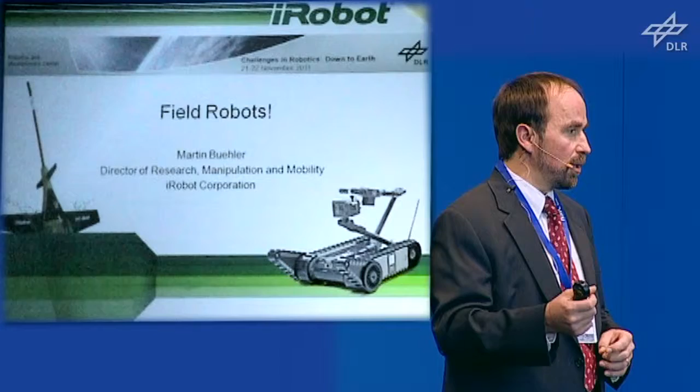Now, knowing that, and given that we have just about only 20 minutes left, I'll keep my message and the story extremely simple. And it's very much in tune with the motto of the Symposium, with the spirit of DLR, which is, let's all together, you and me and all of us roboticists, get down to earth and field robots. So all get down to earth and field robots. There'll be more to that.

But first, I want to get back to the brain. It's a little forgetful, especially since I'm totally jet lagged, so I barely know what I'm talking about right now. But our brains are really good at some things. And I want to start the next slide showing you something that Dr. Rodney Brooks showed in a recent conference at Robo Business in Boston, talking about how wonderful our brains are in terms of perception. So I need your help with that.

So this is a little tough to see on the screen, but it sure looks great on that screen. So what do you all see here? What is that? What do you perceive? Chessboard, checkerboard, with some green cylinder sitting on top of it.

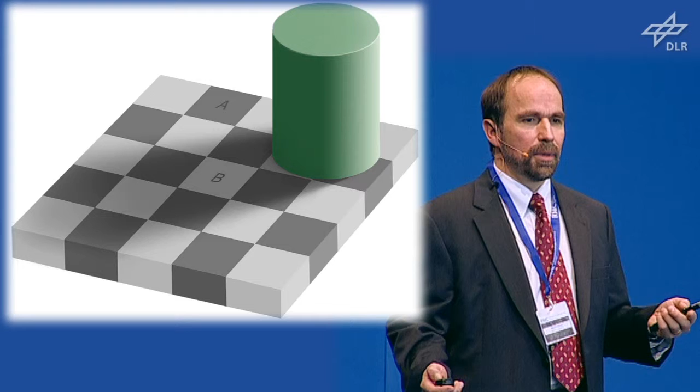So I wanted to pay attention in particular to these two squares, this black A tile and this white B tile. Black A tile, white B tile. So this shows you how amazing our perception is, because the two tiles are exactly the same color. You wouldn't believe that, right? I mean, I didn't believe it. I looked at that. No way.

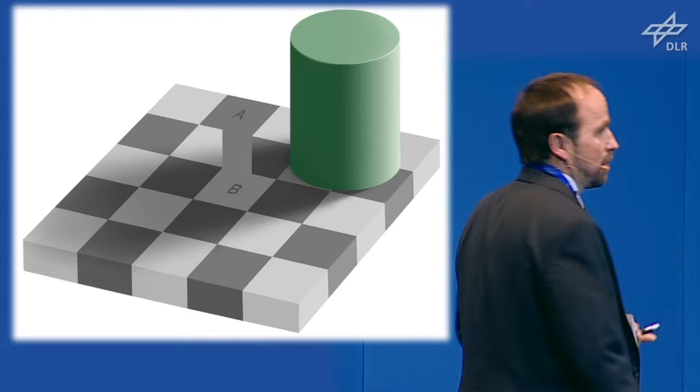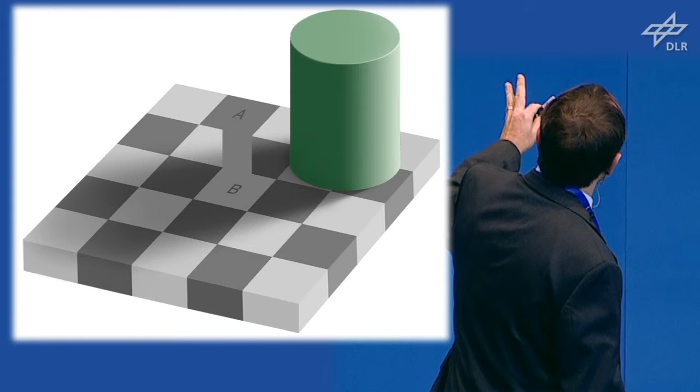They're white and black. So to help you, this next slide, this is all provided by Edward Adelson from MIT, that helps you connect these two bars here to these two squares. Again, it's a little hard to see on this not very high contrast screen, that the two are the same color. And I still didn't quite believe it, because it still looks a little bit different shade of gray. So I took that same picture and I cropped out the two tiles and put them right next to each other. There's no doubt they're exactly the same color.

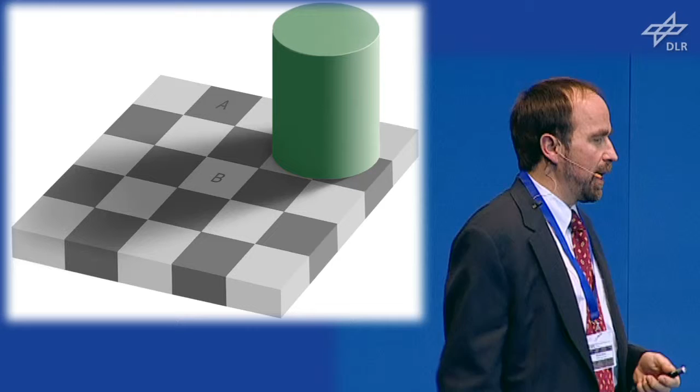So let's go back again. This is where we started. Black tile A, white tile B. This is just an example of how amazing our perception is. And that's combining amazing eyeballs, lots of pixels coming in, together with the brain dealing with all of it and trying to make sense out of the world. This is just a very simple toy example of what we do all the time in much more complicated circumstances. So our brains are maybe forgetful, but they do amazing things in other areas.

So what's the whole point of this? The point is, this is one of the hard problems to solve, and robotics is still far from doing perception like we do. And there are other hard problems, like teaching humanoids to dance and sit down, motion planning, artificial intelligence, dynamic leg locomotion in rough terrain, all very hard problems. We should keep studying those for the next 10, 50 years. But let's take all the great stuff we've developed over the last 50 years, and many of those examples Professor Hirzinger showed us, because those are already good enough to put together in the right combination to solve some real needs in robotics today.

In this talk, I want to give you some examples from iRobot and a few other companies around the Boston area who are living according to the spirit of making practical robots. I'm sure there are many other examples out there, and I'd like us to take that as inspiration to get robots out into the world, so we can take the past 50 years of technology development and turn the next 50 years into a robotic success story, taking robots into mass market applications and making the world a better place.

The mission of the company is twofold: remote presence for government robots, and automated home maintenance for home robots. We have a whole series of robots whose mission is to put distance between harm and people — between danger and our soldiers, between bombs and police and first responders, between radiation and relief workers. Remote presence has lots of applications.

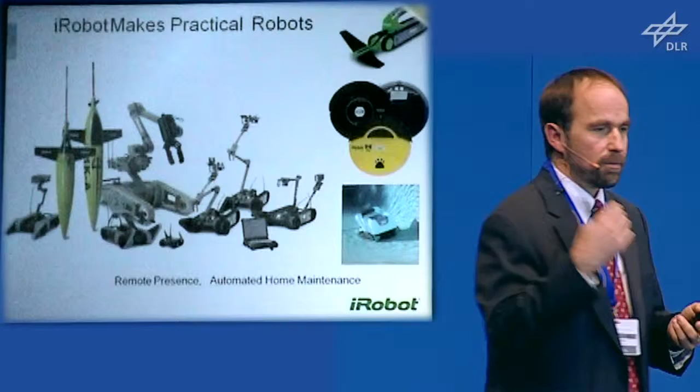We do this across a variety of platforms, from a throwable 5-pound platform we just developed called First Look, to the staple PackBot series we've been selling since 2002, to the 30-pound small unmanned ground vehicles, and very recently we've commercialized the much larger 350-pound Warrior. We also have a couple of robots in the underwater space — these are sea gliders.

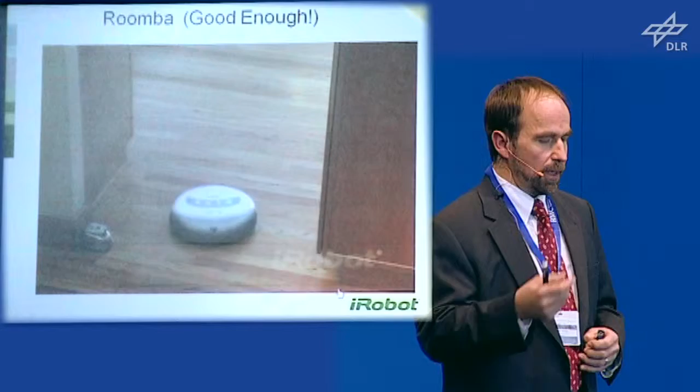A beautiful example — this is an old video I love to show — is the Roomba, getting down to earth with field robots. The company took theoretical ideas from computer science, subsumption architecture by Rodney Brooks, together with simple sensors and reactive controls, and identified a market niche that did something of value to millions of people: vacuuming their floors. Already in 2002, the company fielded a completely autonomous, self-contained, intelligent robot that vacuumed people's floors and returned to the dock when done or when the battery was low.

One nice thing about fielding things early and often is that the market does extensive research and testing for you. At this point, I usually like to show a fun video of a cat riding on a Roomba, and I encourage you all to look those up — there are hilarious cat-on-Roomba videos.

This time, I want to show you some serious field testing that shows some of the abuse and rigor our products see on the living room floor. By the way, this is not an approved use of our product, and it had to go through many iterations to be able to perform this function. I believe it's mostly the fathers who do this stuff and send us those videos.

Moving over to the government and industrial side, here's a quick snapshot of some of the robots in action: PackBot driving around in dirt, SUGV climbing stairs. Our robots are used by police and first responders — there are lots of bomb threats — and they're also saving lives in the military. We do research projects with precision placement. This is the Negotiator robot, which we sell primarily to police and first responders, and it's also a research platform for navigation and SLAM.

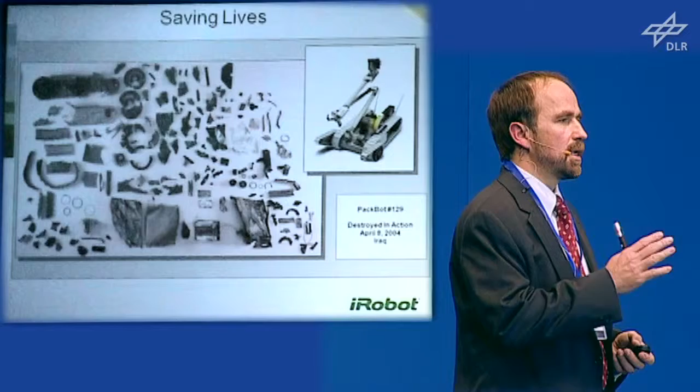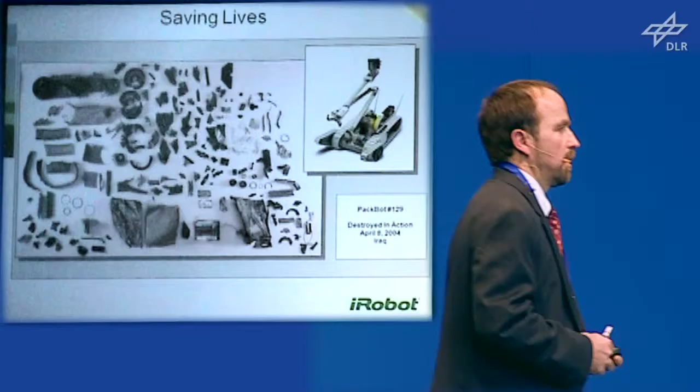This robot that came back, nobody had to write a letter to this robot's mother. It's very easy to replace robots. They're used extensively. I think the number as of last year was, robots like the PackBot have been used over 50,000 times in 50,000 roadside missions. Just imagine the good and life-saving activities this has provided.

Having these robots available, they're rugged, they've gone through many iterations, much money went into developing them, they're easy to use, they're fully supported. Now we're in a situation also to come help when disaster strikes, when duty calls.

And we did that on 9/11 together with other robot companies. At that time, DARPA, the Defense Advanced Research Projects Agency, literally took dozens of robots out of research labs and brought them to the New York disaster site to help look for survivors, go into contaminated areas, or enter partially collapsed buildings.

9/11 was really a watershed event for robotics. Before then, no robots had really ever been used in disaster scenarios. After 9/11, they have been used in every single disaster that happened, deployed on the ground, in the air, and underwater.

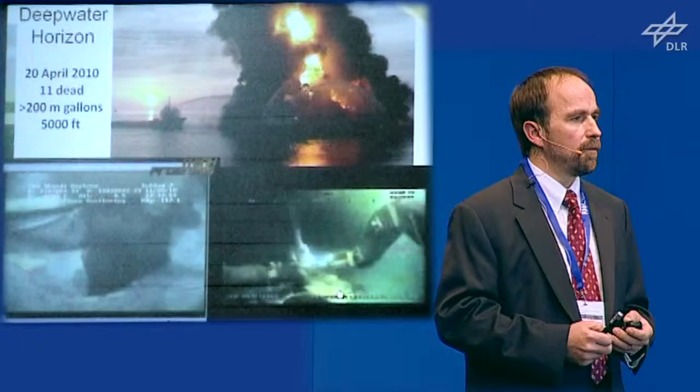Talking about underwater, many of you will still have vividly in their memories the accident that led to an explosion of the Deepwater Horizon rig. Last year, 11 workers died. After everything was said and done, 200 million gallons of oil spilled into the Gulf of Mexico. And all this action and the leak happened at an incredible depth of 5,000 feet. Very difficult to get to.

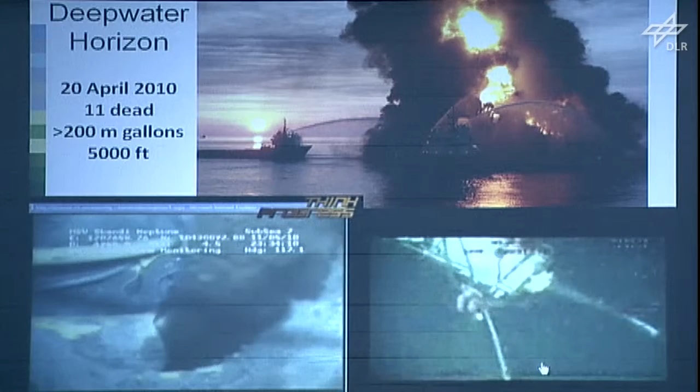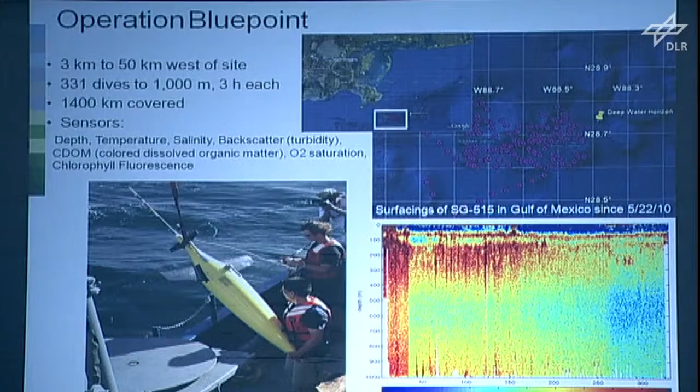There's no human divers that can operate there. So there were literally dozens of robots in operation down there at 5,000 feet, putting eyes on target, helping to figure out how to plug the leak, and actually helping to plug it. At the same time, there were questions and actually some controversy: where was all the oil, all those 200 million gallons? Some could be accounted for, but the suspicion was there were giant oil plumes floating in the Gulf of Mexico.

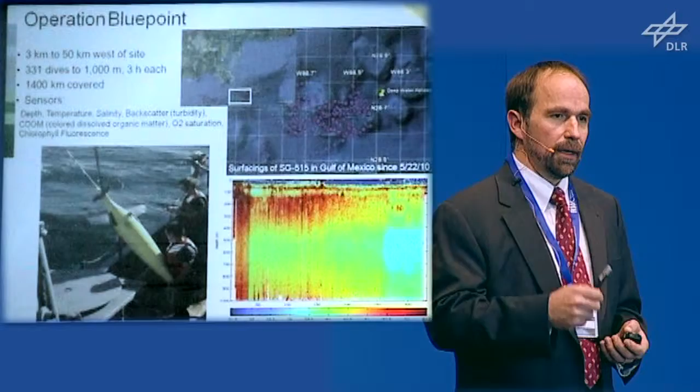We had the technology, the Seaglider that you see here, that we could bring to bear on this. Shortly after the disaster, a couple of highly motivated folks from our North Carolina office simply took the initiative, without anybody requesting, threw a Seaglider on the back of a pickup truck, drove down to Louisiana, deployed the thing, and we did over 330 dives. We worked with local scientists to analyze the data to help settle the controversy that yes, there were giant oil plumes, and then helped monitor the contamination, where the oil was, how much oil there was, and how the oil density and occurrence was developing over time. This was a very important contribution to monitoring the disaster and helping guide the cleanup efforts.

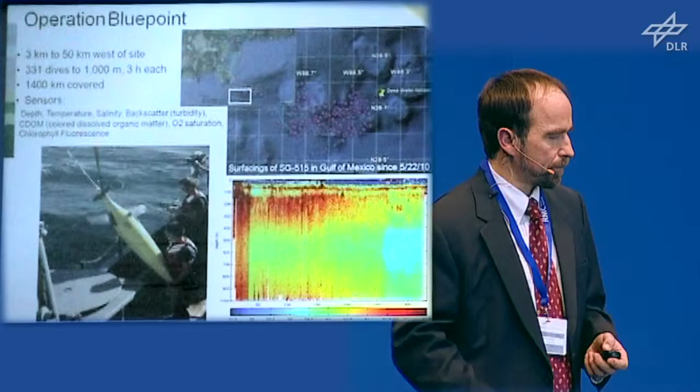More recently, again, duty called. Japan was struck by this unimaginable tragedy, a triple tragedy of an earthquake, tsunami, and then a nuclear meltdown. Our heart goes out to our friends in Japan. They lost 15,000 people.

This was also the first time in history that there was a triple meltdown; 3 reactor cores all melted down. We got a request from the Japanese self-defense forces for some support, some robotic support. Within 26 hours, we had modified and customized 2 Warriors and 2 PackBots and shipped them off to Japan. And courtesy of our existing relations with Japan and other business connections, it was possible for us to more quickly than anybody else ship our robots there.

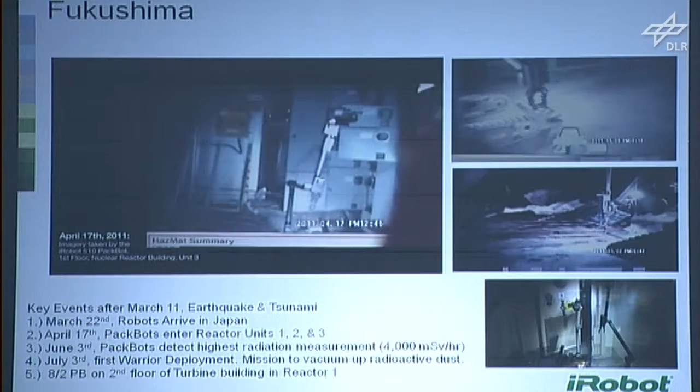Here are a couple of videos. The one on the left is an early video showing the PackBots, the first robots to go inside the reactor buildings and bring back invaluable data, since it was the first time people could see what it looked like inside using the video feeds from the robots.

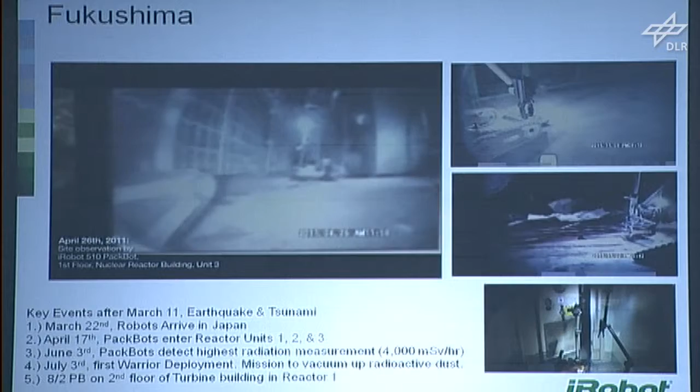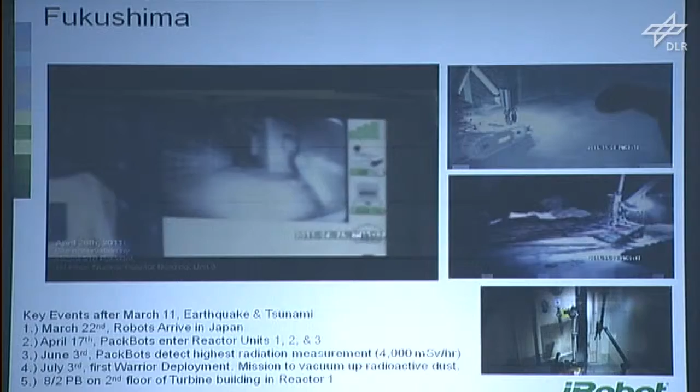They had sensor payloads, because our robots have a modular payload bay to add temperature and radiation monitoring. So the robots were able to make maps of the distribution of radiation and temperature, and take video shots like here of this broken steam venting pipe with very high radiation. In fact, some of our sensors on PackBot measured record radiation of 4,000 millisieverts per hour.

4,000 millisieverts per hour. Do you know what the maximum allowable human exposure is? That's 50 millisieverts per year. So you can imagine how difficult and dangerous it is to go in there.

And this is a perfect application for robots.

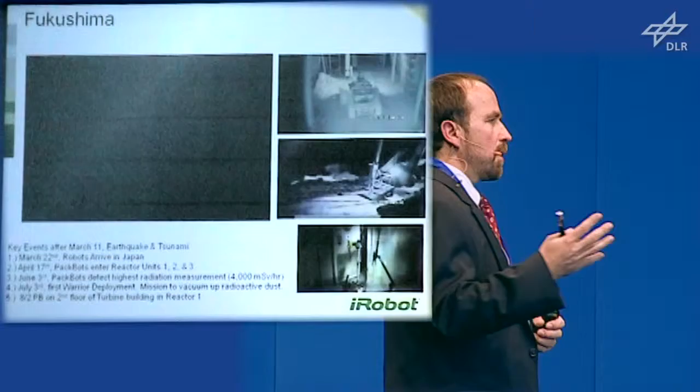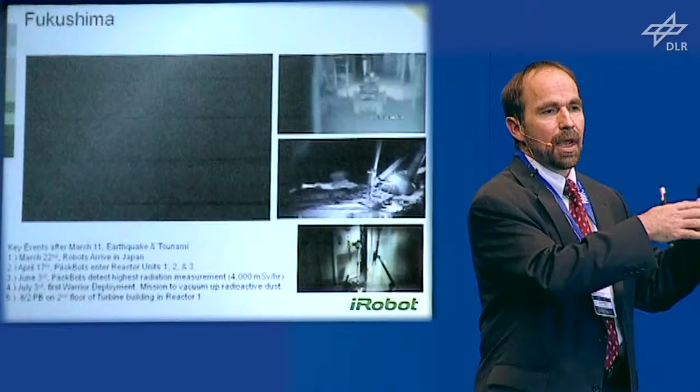Some of these videos, again hard to see, but available on websites as well, show more recent footage, only 2 weeks old. Now the TEPCO folks and the people operating the disaster mitigation effort are running these robots, both Warriors and PackBots, together inside the reactors to clean up. In fact, the Warrior was fitted with a giant vacuum hose, so it looked like a giant Roomba vacuum, sucking up radioactive water and debris to bring down the radiation levels.

So the robots have been deployed for just over 6 months, and they're still working reliably and rendering good service. In fact, the operators are so happy with them that they just ordered 2 more PackBots.

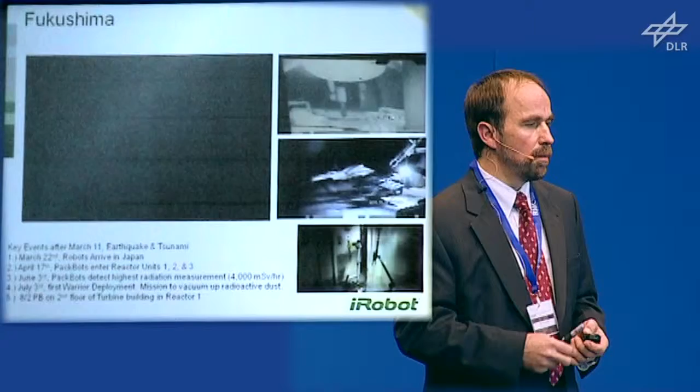So you wonder, how is it possible that these robots keep running? They're not radiation hardened, not space hardened. They're military grade, but certainly not radiation proof, and they just keep on going. With these extreme radiation levels, there's really no great magic here. I think there's a little bit of luck, in that the type of radiation in these reactors, though very high intensity, is very low in the gamma radiation range that is so detrimental to optical lenses and computer chips. So that's in part what contributes to our robots being able to keep running despite the high radiation.

I want to show you a quick video of some new technology that iRobot is developing. It goes again to the motto of the talk: let's take what we have and solve a real need, because we have a lot of good stuff already. This is not a product yet, it's a technology demonstrator. So we use this to show potential partners and clients, and then to customize particular applications. For example, we've just made a deal with InTouch Health. They do hospital robots, so we're working with them as one of our first partners.

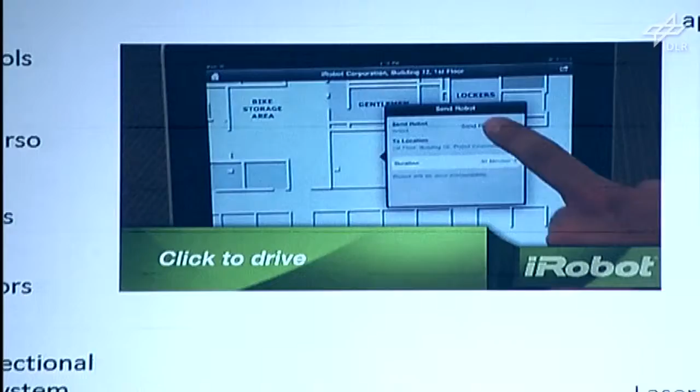So what is AVA? AVA is short for Avatar, so it's in the remote presence area. It's an app-ready robot, meaning you can program it with apps, just like your iPhone or iPad. You can plug in your pad up here, whatever pad you have, Android pad, iPad, or whatever pad comes out, and it's your user interface, the thing that runs the apps, and it calls upon all the hard robotic stuff that we've wrapped up nicely and that lives in the base.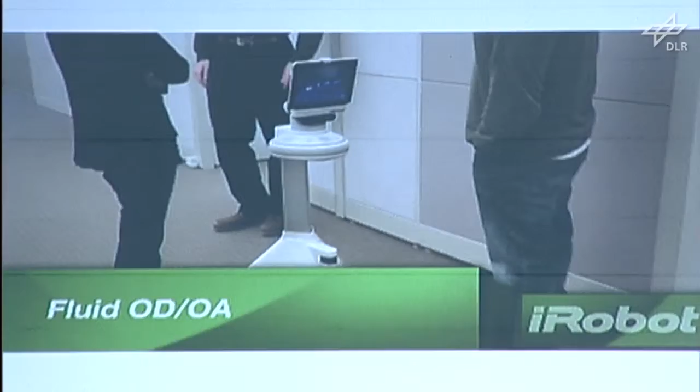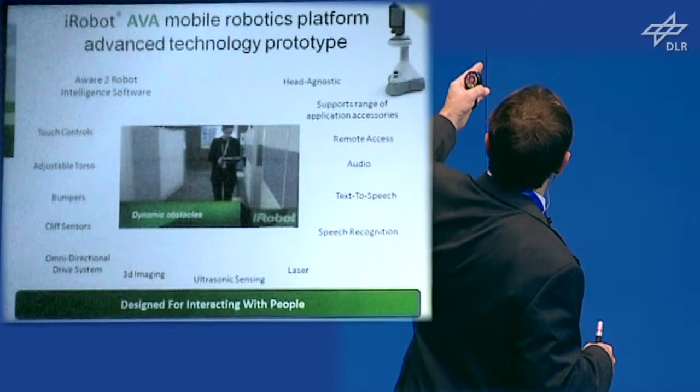And that's communications, computation, sensing, that permits autonomy. Like we have a whole range of things that you see while the video is running, like map building, localization, navigation, SLAM, all the good stuff, obstacle avoidance, avoiding people like you see here, path planning, and replanning. When it doesn't get to a certain space, it replans.

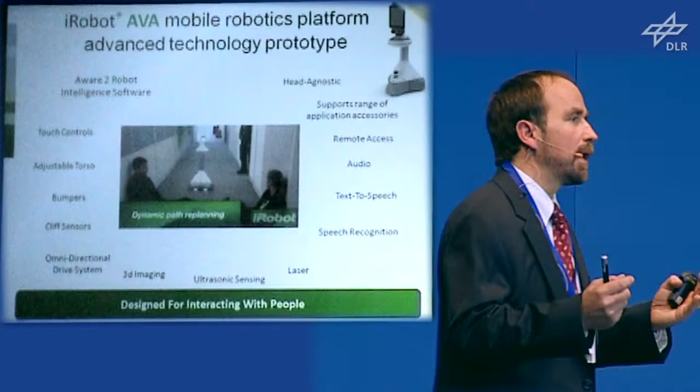You can move it around by simply clicking on a map, or writing a map that says go to the kitchen. So this lets you basically customize this technology to be your butler. You are, get me a beer robot, well it still needs an arm for that, or a hospital robot, or a remote factory surveillance robot. That's the idea. Oh yeah, you saw sometimes people are not very helpful, a little obstructive, and the poor robot doesn't have any arm to fight for itself, but it has great memory. It remembers.

Now I just want to show you a couple of examples of how the iRobot family is enlarging. Family in the sense that I want to show you quickly 4 companies that also embody sort of the spirit: let's take what we got, a lot of good stuff, and identify a need to get robots out there.

So these 4 companies were either founded by former iRobot employees or iRobot co-founders themselves. The first one is VGo Communications, founded by 2 former iRobot employees.

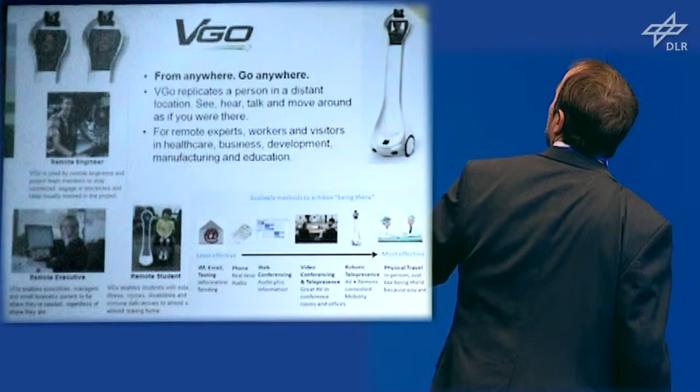What are they doing? They basically have something similar to AVA, but it doesn't have any autonomy. You drive it around remotely. It's your remote presence robot.

A large number of companies that I visit have these sitting around now. They enable remote engineers or workers to dial in and drive around, participate in meetings, or hang around the water cooler. Bosses, while traveling, can check in at home, or have a couple of these at various subsidiaries to drive around and interact with people.

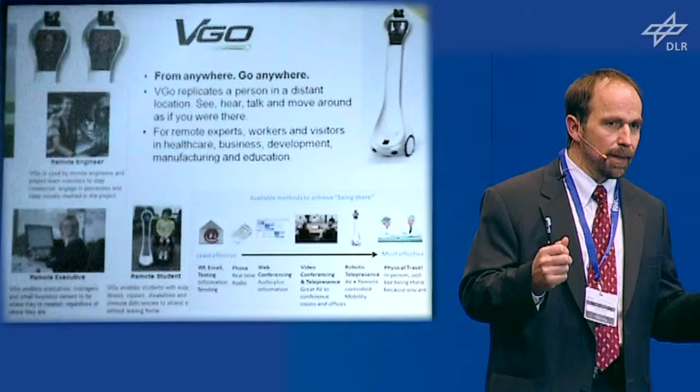Hopefully being nice about it, not sneaking up on people, just checking up on them. Also, several schools have bought these to allow children who are incapacitated or somehow have to be at home to participate in school. It's quite a different experience than having just a webcam on a desk. They can actually move around with the class from room to room and interact with the other kids.

It's very popular. It really fills this identified niche between the most effective way to communicate, face-to-face, and other existing ways like video conferencing, web conferencing, email, and phone.

Next one, we don't have a lot of information on this - Heartland Robotics. This was founded by Dr. Rodney Brooks, one of the original founders of iRobot, who has since left to run Heartland Robotics. The motto here is machines and humans working side by side.

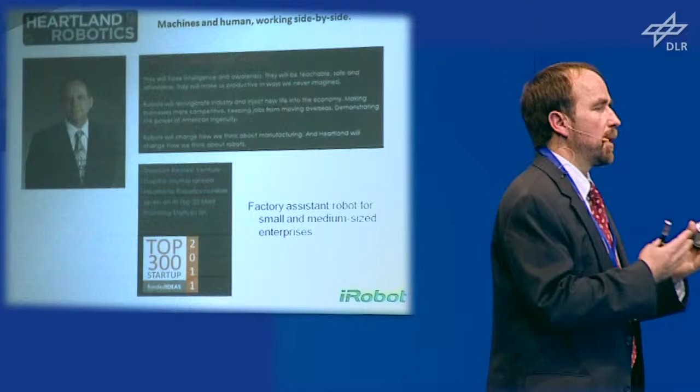There's a lot of hope and expectations riding on this company. The premise is that the development here - and again this is still in stealth mode, so this is hearsay and what's semi-publicly available - is that they will develop low-cost, easy-to-program factory robots, probably with an arm or 2, that can work side by side with humans in assembly and factory tasks. The point is to help the heartland, meaning the US manufacturing base, become more competitive, keep jobs in the country, or even better, grow the manufacturing base that's been dwindling for decades.

CyPhy Works, unfortunately also still in stealth mode. This is another company founded by one of the 3 former iRobot co-founders, Helen Greiner. What we know is that at least one of the projects the company got funding for is to develop an unmanned aerial vehicle for infrastructure inspection - to look after roadways, bridges, and dams. Hopefully we'll know more soon when they come out of stealth mode.

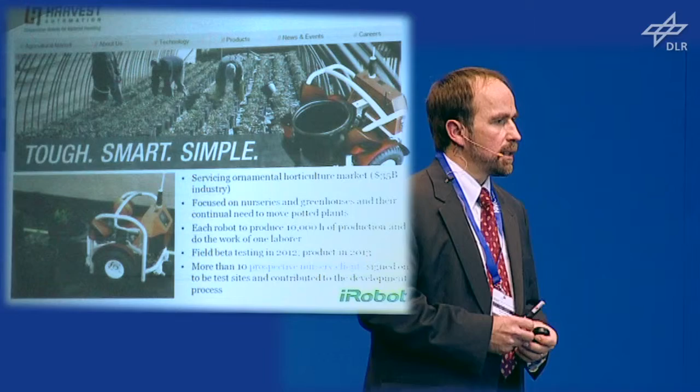The 4th and last example is Harvest Automation. Again, these are all Boston area companies. Also founded by 3 former iRobot employees in 2007.

They've spent a couple of years looking around at all the possible markets, and identified nurseries and greenhouses. It came as a surprise to me, but it turns out that's a over $35 billion market. Huge warehouses with thousands or tens of thousands of pots sitting around, employing hundreds of people who do nothing but move pots around all day.

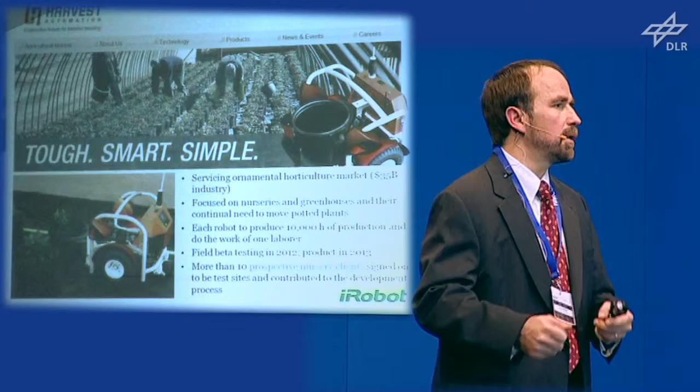Because these pots somehow need to be moved - from A to B, or spaced differently as the plants grow. This huge labor demand is right now filled by migrant labor. It's backbreaking work, and this industry has been hoping for automation or some kind of relief from technology for a long time. This may be just it. So this is very exciting.

I want to keep it short. To conclude, all I wanted to say is we've got so much good stuff. Professor Hirzinger has shown as well, in the same spirit, lots of good technology spinning out. A lot of this technology is good enough to solve real needs. We really just have to put some of our brains from solving technical problems to figuring out what consumers want, and package them up to offer something of value, something useful at a low cost.

And that's how we can turn all of our investment from the past 50 years of technology development into the next 50 years of creating a better world with robotics. Thank you.